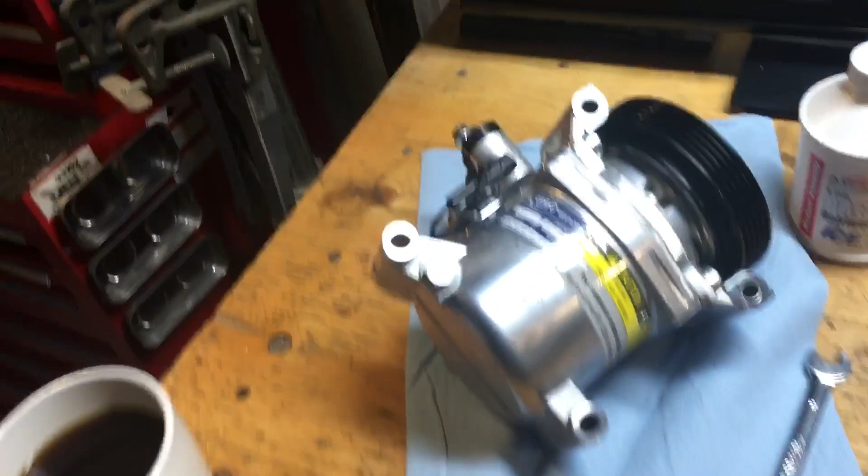So I'm going to get on with the air conditioning refrigerant compressor replacement in this car, guys. You guys know the story. Lots of issues with the car over the past. The compressor that's currently in the car has multiple issues.

The main one currently being bearing failure. So why not replace the bearing? As I said, there's multiple issues. Look at the back videos if you're interested. There's the part number, manufacturer. Take note, the oil, the refrigerant oil that's in here is PAG 100.

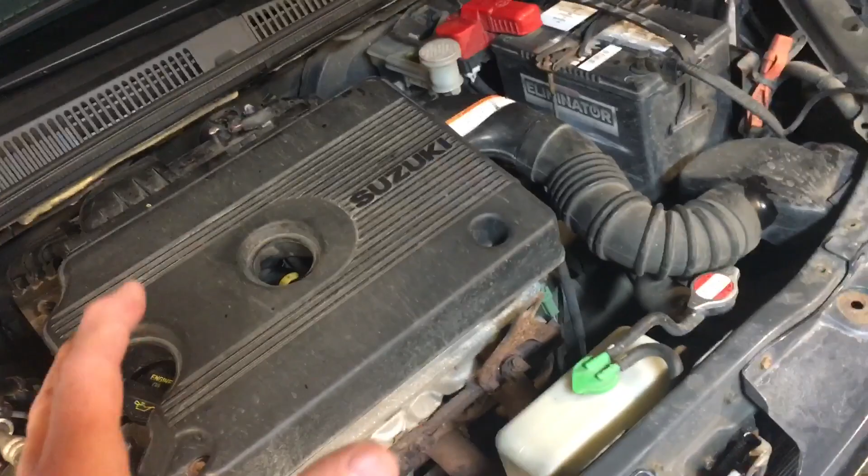The car is originally equipped with 46. Okay, so let me say this again, because somebody pointed out in the comments that I've got the wrong oil. The original installation calls for PAG 46. Why am I putting 100 in there? Because the compressor is the most critical component in the system with respect to lubrication requirements.

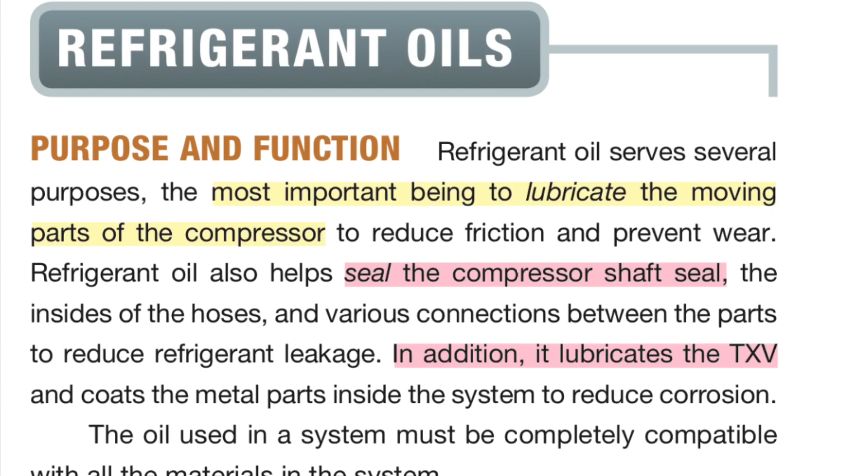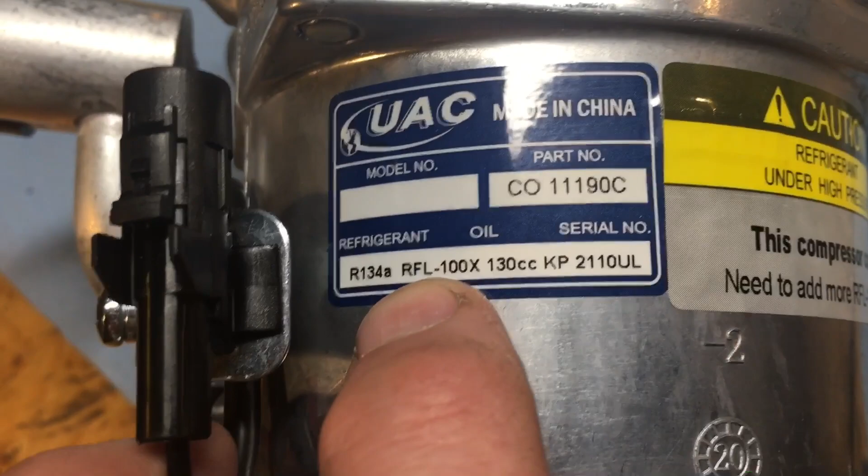Don't take my word for it. Here's what James Halderman has to say. Apart from the expansion valve, the thermostatic expansion valve, which moves very little, of course, this is the main concern with refrigerant. It seems kind of stupid to ignore the specification that the manufacturer spells out, both on the compressor and on the box. There's the part number, by the way, if you're interested.

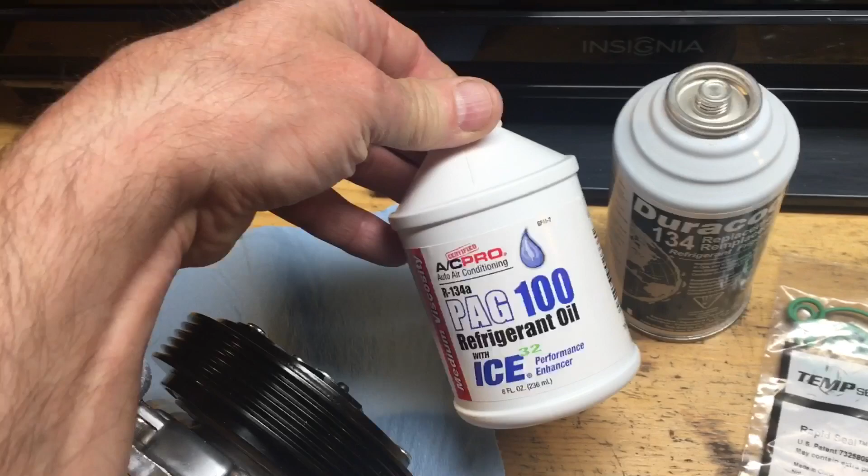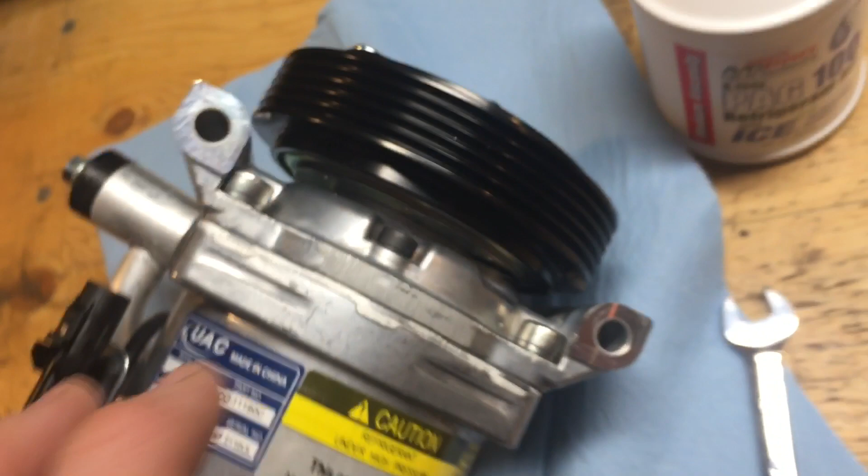100, right? We'll do a bit of an oil balance. I'll try and purge the system best I can. So you'll need the compressor, of course. You'll need perhaps oil, I don't know. Well, this comes shipped with 130 cc's in here. The decal actually tells you so. Although 130 cc's of oil is not 5 ounces, but academic perhaps.

Another point of interest, I will be using an R134A replacement, guys. This is basically propane butane mix. That's why when you see, when I've got the manifold up, it might not be R134 that I've got on the screen as far as the refrigerant in use. It might be the propane spec. I think it's R700 and something, I don't know, I'll look it up. So in case that confuses you, just to be clear.

So I'm going to show you a wee bit of a summary of how I'm going to approach this.

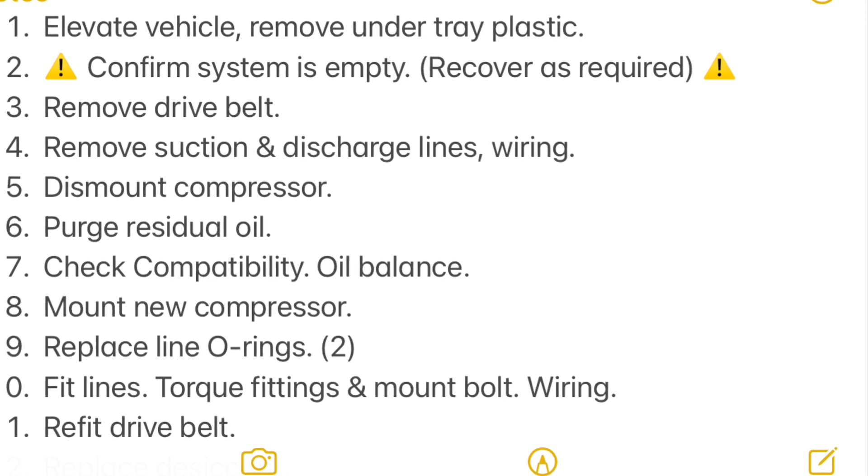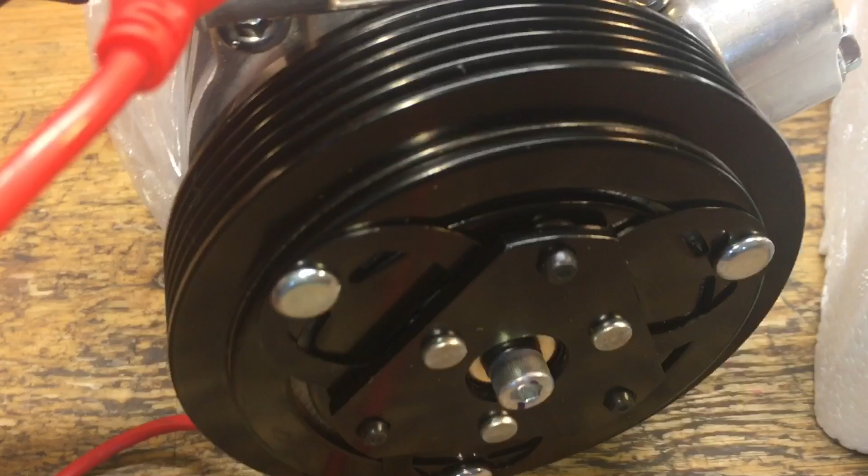It's functional. You can see the coils clearly pulling in the clutch. And so about 3.7, so that's about 4 ohms ish. Quick math, sounds about right.

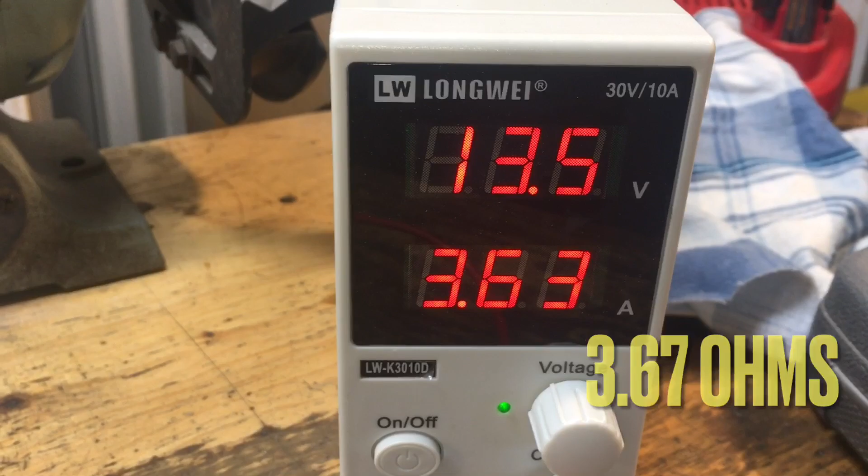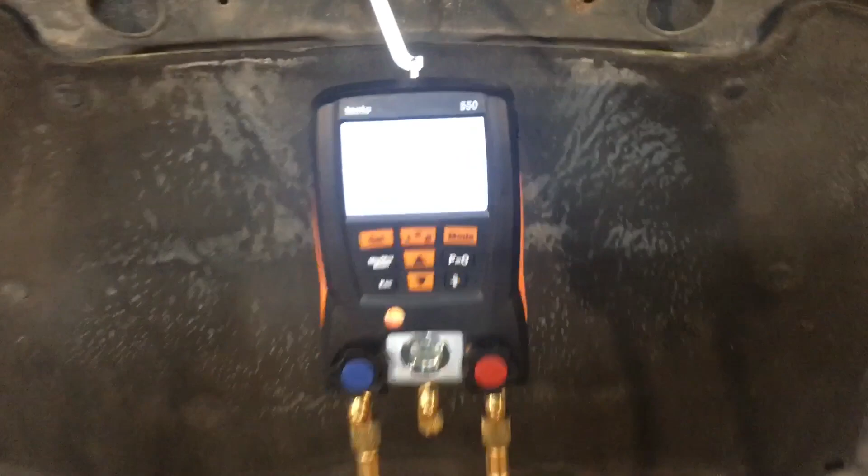Be sensible. So the gauges are hooked up to the car here, guys. You can see the system is completely empty. Both valves are open, and the depressors are screwed down on the couplers. System's completely empty.

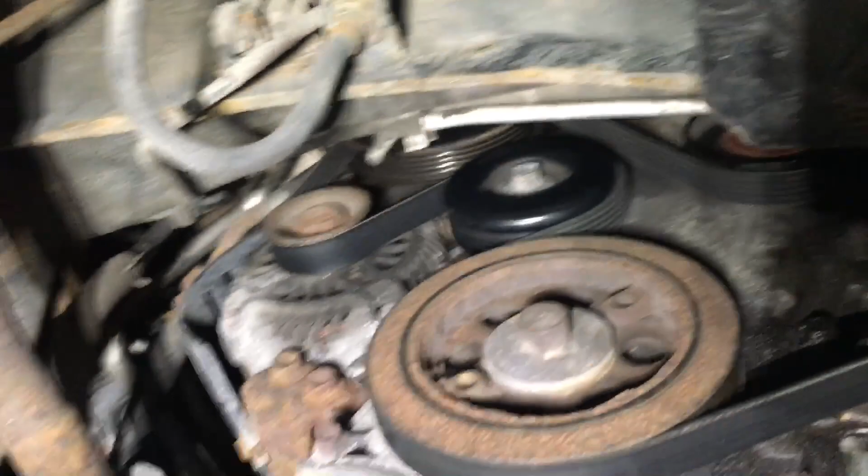Try and do this one-handed. 14 mil onto the belt tensioner there, guys, to remove the belt. This is a non-AC belt. I actually had this jumped out because of the state of the bearing.

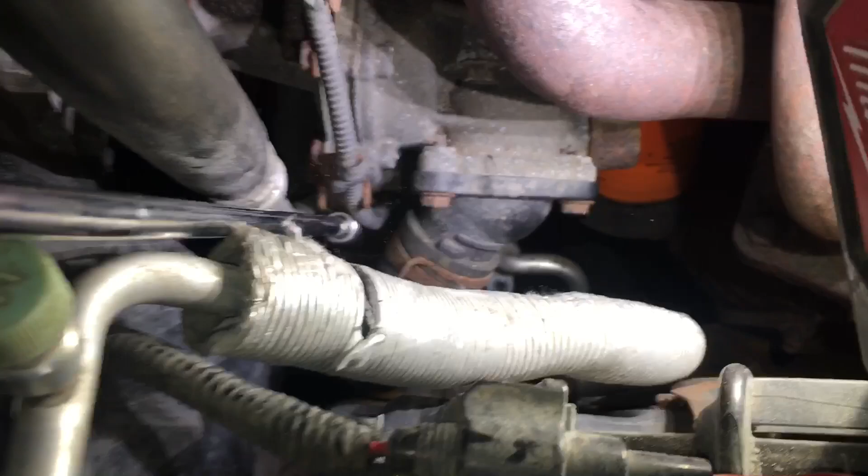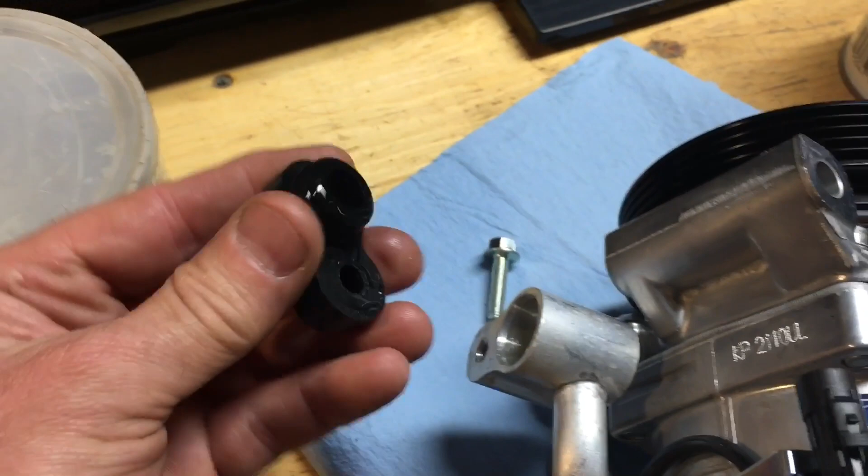A long extension with your 10mm socket, guys, is ideal. The angle is reasonable. You get down on those 2 bolts to hold the lines on. The O-ring will need to be replaced, and be aware the caps on these, they are in fact O-ringed. This is pressurized with nitrogen, I believe, when it's shipped, so be aware when you remove it.

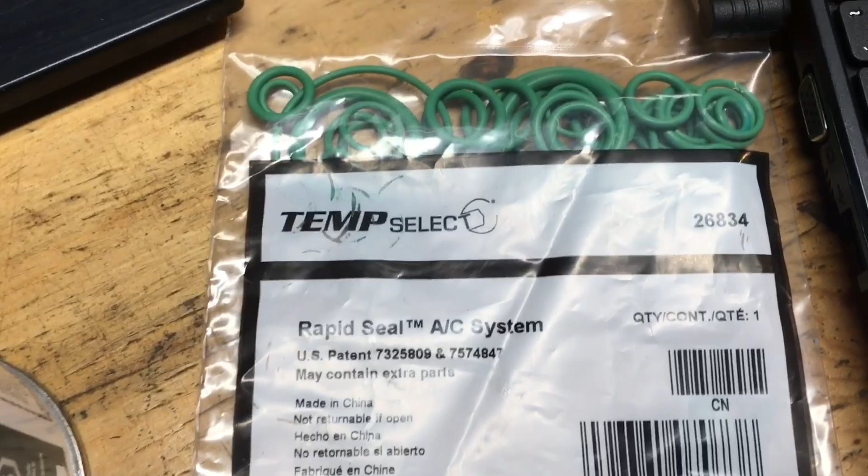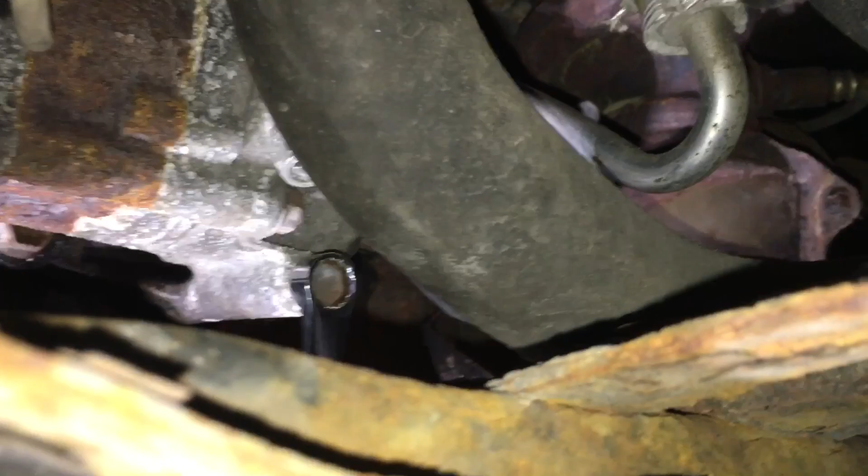And I bought myself just a generic O-ring kit to replace the rings. So the 4 mounting bolts here, guys, ideally if you have a long spanner to crack them, because they'll be corroded in there pretty tight by the time you get to them, no doubt. I had this compressor off last year, so these are not too bad.

As I said, 12 mil. They're quite long.

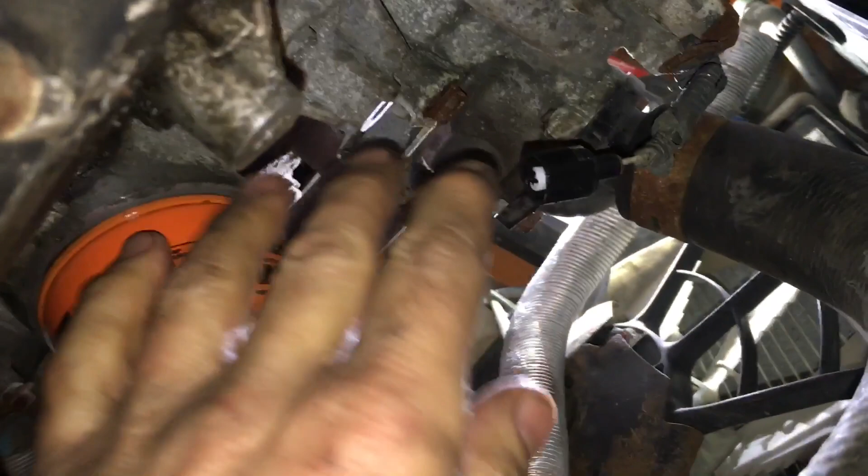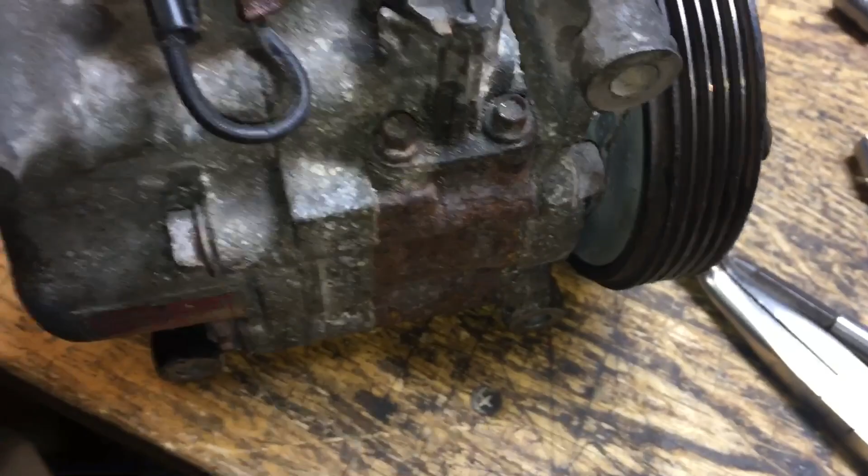Just before you remove the last 2 bolts to get the compressor out, guys, don't forget about the connector here. Try not to damage that. You're going to have to reuse that. Pretty straightforward, not rocket science. As I said, 4 bolts. The 2 bolts for the lines, 10mm, and the lines themselves.

The compressor is a wee bit different, being an aftermarket one. It's probably designed to be used on different applications. But the main mounting points, of course, is a showstopper. They do appear to be the same.

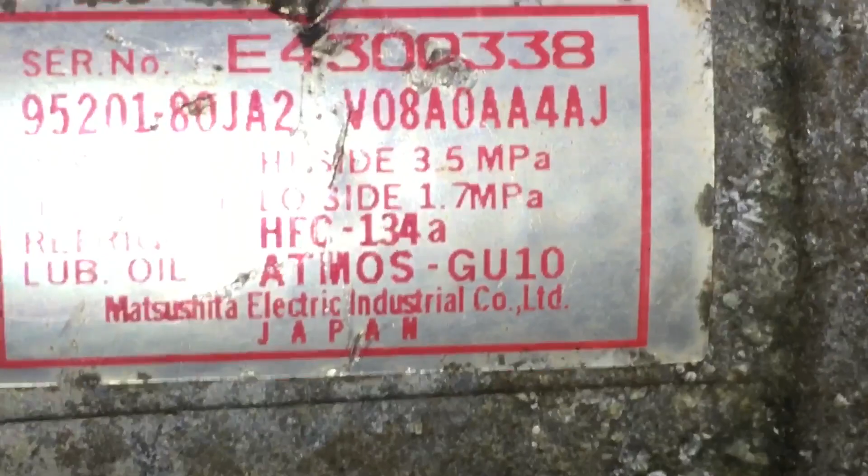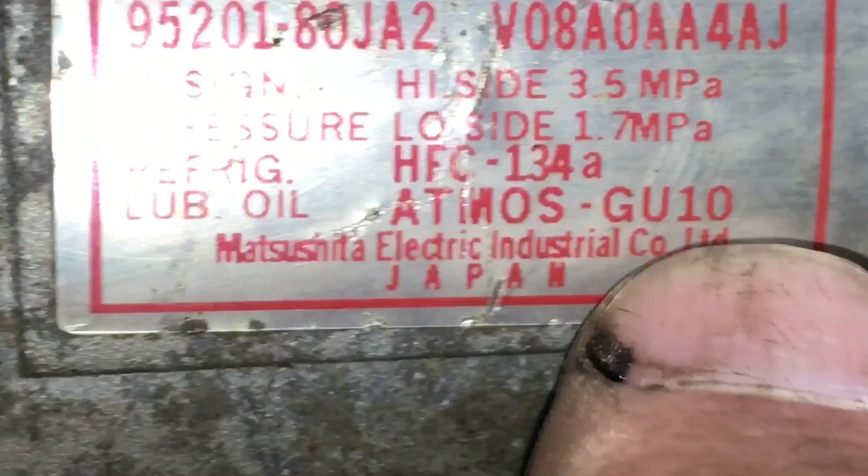I think I mentioned this is a Panasonic compressor. Perhaps I was mistaken. It looks like a, well, I'm mistaken. It looks like it's a Matsushita. Yeah, and although that doesn't say PAG 46, I think if you cross-reference this, it is PAG 46, the original installation.

So you can see they have an adapter line here to bring this line up to roughly where it should be. I hope none of this causes any grief. Physically, it's a wee bit different in location. The connector appears to be the same, although the orientation appears to be different. Again, hopefully that's not an issue, but I guess we'll find out.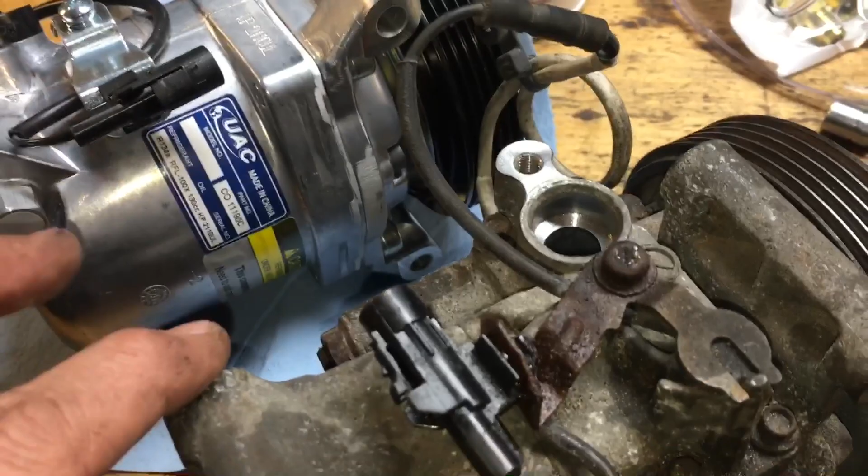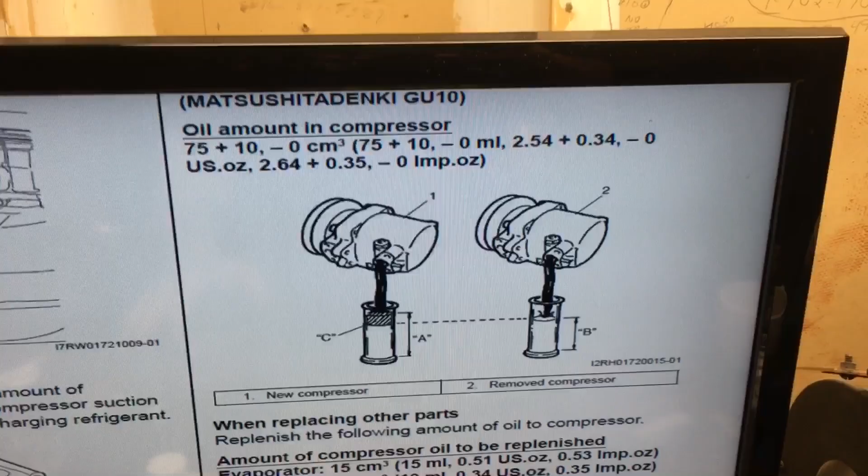So here's the segment in the manual, guys. It tells you how to actually balance the oil. That is to say, when you remove the compressor, how to make sure you have the correct amount of oil in the system. So it also tells you for the relevant parts in the system how much volume of oil.

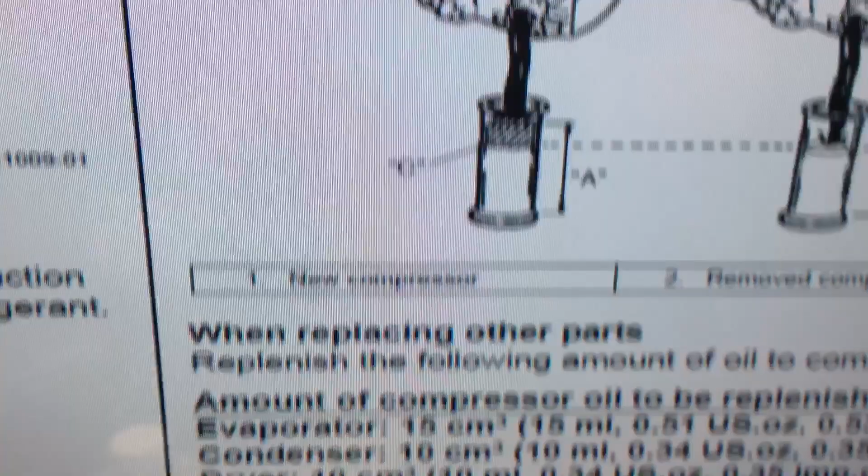So what I've done is I've taken, when you replace the compressor, it says 75 cc's of oil. I won't bore you with the details of all the other components, but also if the refrigerant is replaced, it tells you another 10 cc's. So I've done the math, and guess what? It adds up to 130 cc's, which is what's in here.

So I'm in a position where I'm going to attempt to purge any oil in the system, get as much as I can. It's inevitable I'm going to have a bit of intermix, but as far as I know, 46 and 100 are miscible. So a degree of intermix is, as I said, inevitable. Not ideal, but I'm going to see how much oil I can get out of this, although I suspect it will be very, very low.

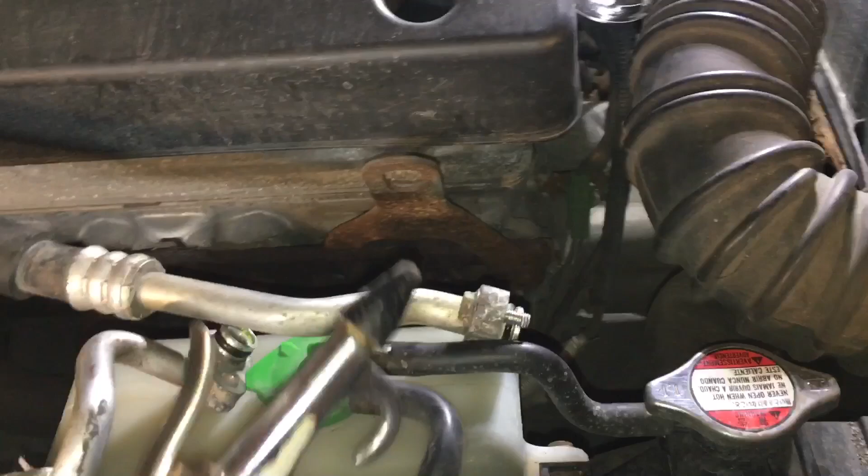So, as suspected there, guys, I didn't get much out of the compressor, 10 milliliters, cc's. So because of the oil spec issue, what I'm going to try and do is blow the system out to see how much oil I can actually capture, and then once I have the figures for what I've removed versus what should be in there, I'll try and make a judgment call. Not ideal, but I don't see how else I can actually deal with this.

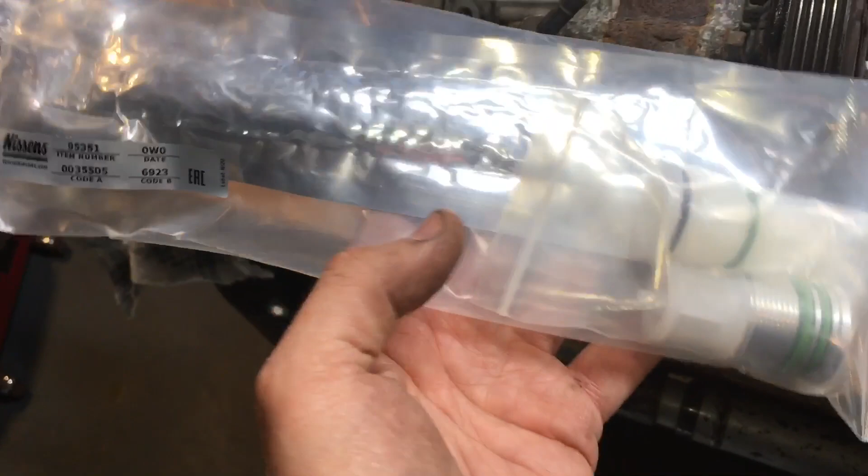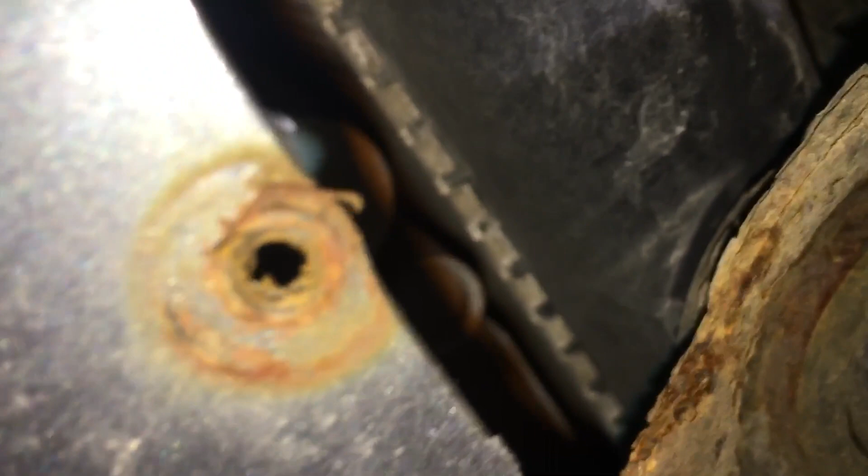So as I said, guys, because of the likely contamination in the system, moisture wise, I'm going to change the desiccant bag anyway. So you can see there's a couple of plugs on the bottom of the condenser that houses the desiccant bag. Now this is an aftermarket coil, so yours may be different if it's the original installation, which I think is a Denso. This is a Nissens, not to be confused with Nissan, but Nissens.

So I'm going to take that plug out the bottom. That's where the bag actually slips up the tube there. And I'm going to assess the oil that's in the system from here. Again, trying to make a reasonable decision.

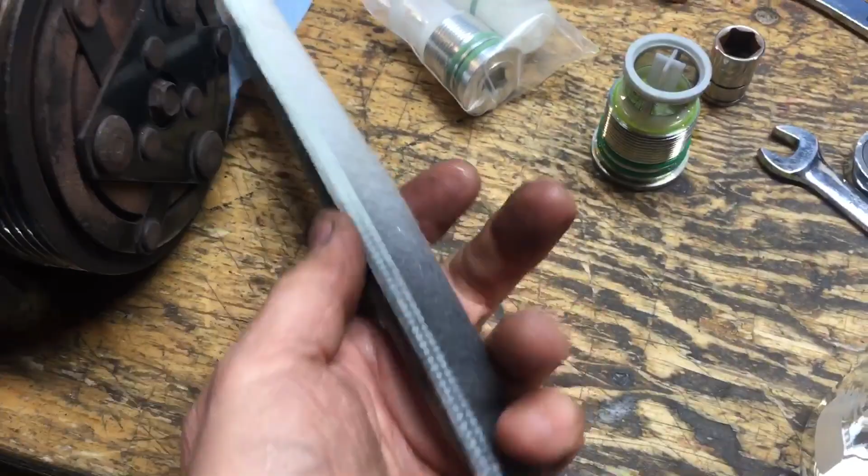So there's the plug. There's another few milliliters of oil in the bottom there. I expected this to be drenched in oil, but it seems light and dry, so perhaps that's a good sign, a good system. Although I think that blackness is probably moisture. Perhaps that's normal to some degree. I'm not sure. No expert, not by a long shot.

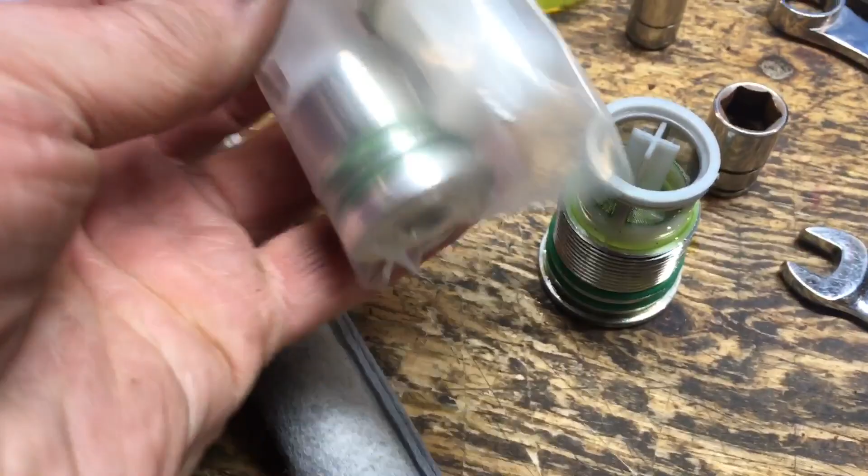None of these plugs seem to be the same diameter. I'll just reuse those, change the O-rings. So what I'm going to do is again try and blow this out from the top side, because of course the desiccant bag is right at the very bottom of the system. I've got the plug out and the catch beaker there. I'll see if I can get any oil out.

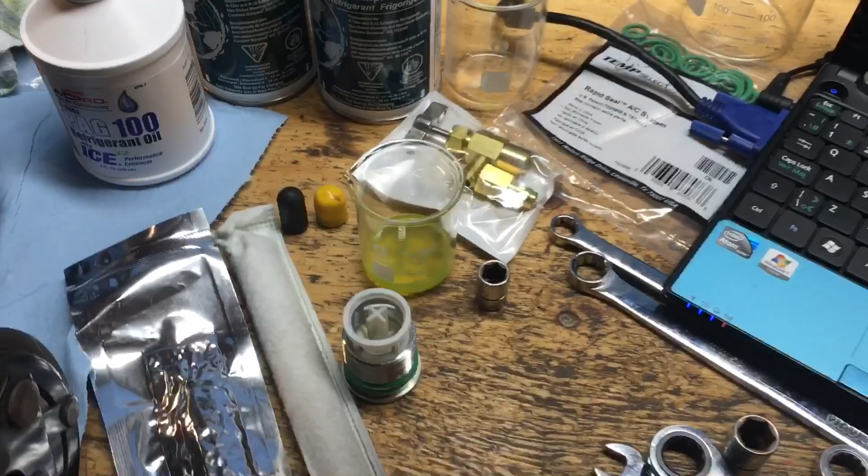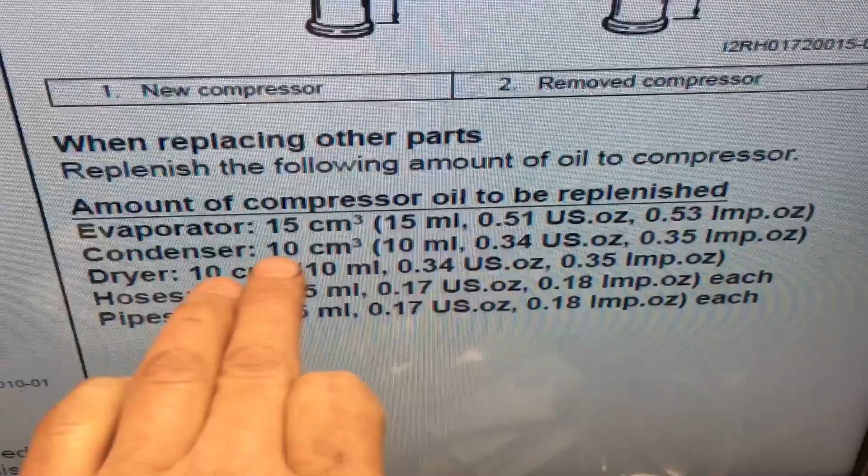Okay, so I was really only able to capture nothing more than a few drops out of the system. So that means this is 10 milliliters, let's say, if the system capacity is 130 milliliters. I'm basically missing about 120. Now, I know when I changed the condenser coil on this a year or two back, I put the correct measure of oil into the system. So I think there's essentially no oil in this system.

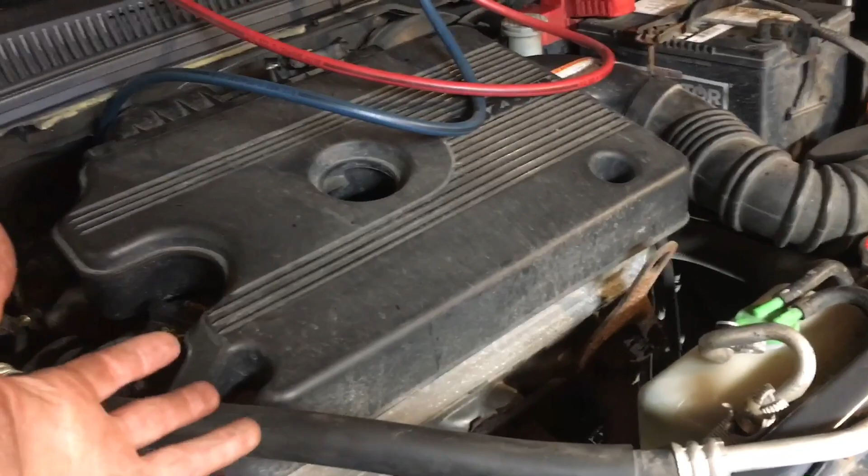I blew it out with my line there. I cranked the pressure up and blew it every which way till Sunday. I can't really extract any oil in there. No doubt there's residual oil in there, it's trapped. X amount of oil can remain in the system. How much? I don't know. But I think it's a pretty small amount.

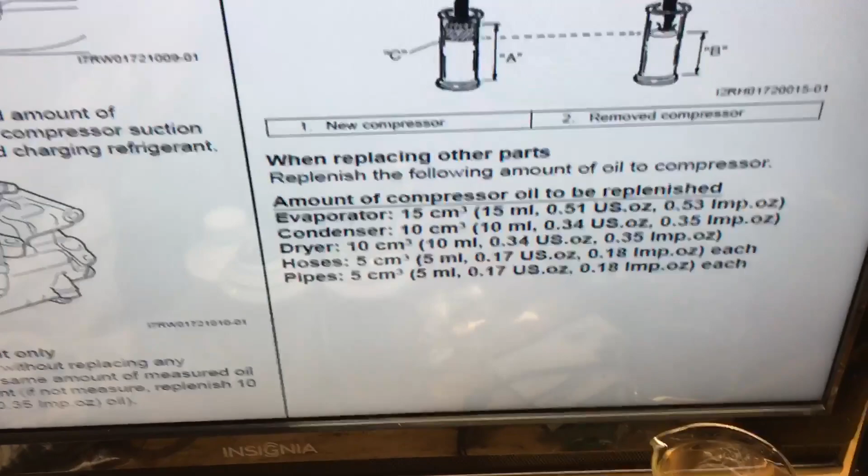So that leaves me with a decision to be made. This comes shipped with the entire system measure of oil of 130 cc's. We've already talked about the volume in the system. I think with this being extracted, it leaves just a residual amount of oil, the original PAG 46 in the system. And again, as far as I know, it's miscible.

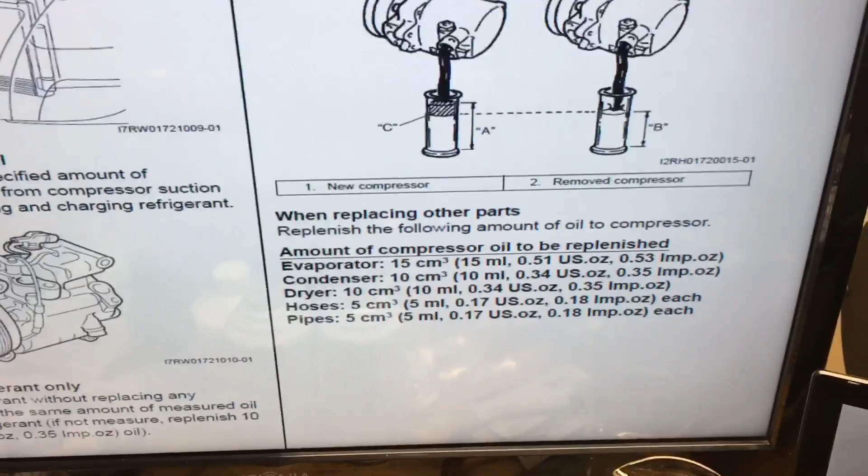So I'm just going to go with this measure of oil in the system on top of the unknown quantity in the system. Now, it might be a wee bit over capacity. So what's the danger of overcapacity? As far as I know, it just can affect heat transfer, less than ideal heat transfer in the system if you have overcapacity oil, too much oil. And of course, ridiculous amounts of oil could potentially slug the compressor, but I don't think that will be the case at all.

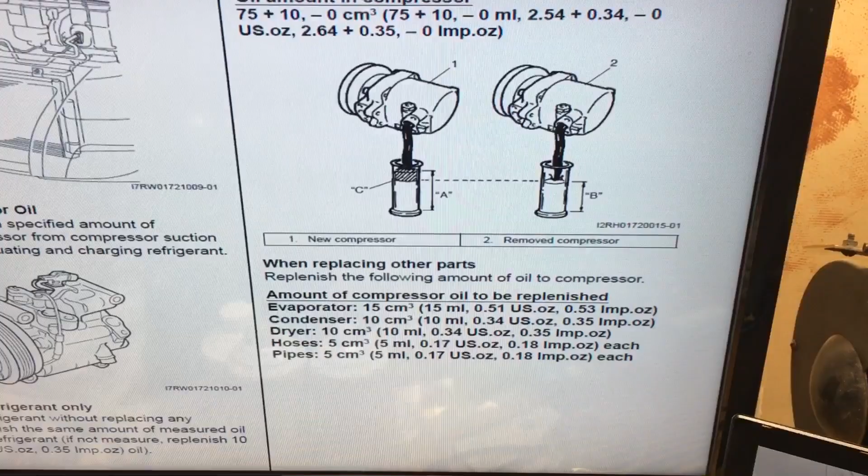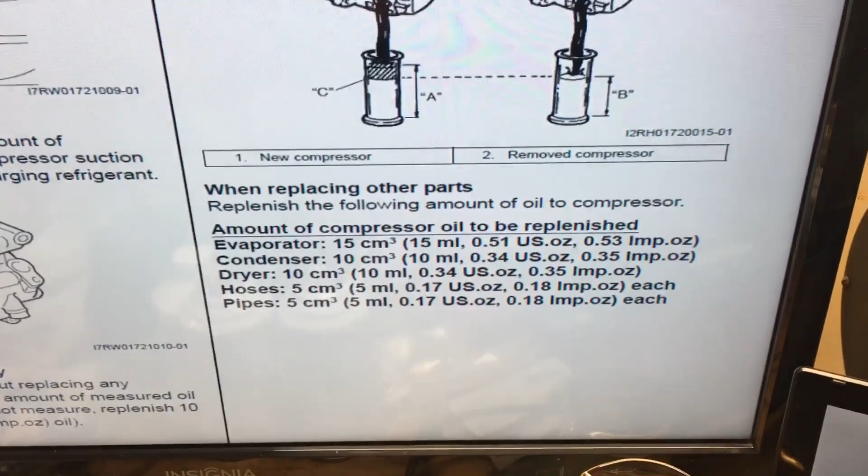The danger of under-oiling the system is you melt the system down, of course. I'm trying to avoid that. So this may not be correct—by all means, sing out in the comments if you disagree with my decision. But I'm going to just leave the standard measure of oil in here, 130, that's the complete system volume on top of the residual oil that's in there. I can't remove any more. I'm not flushing it, that's going overboard. We'll leave it at that.

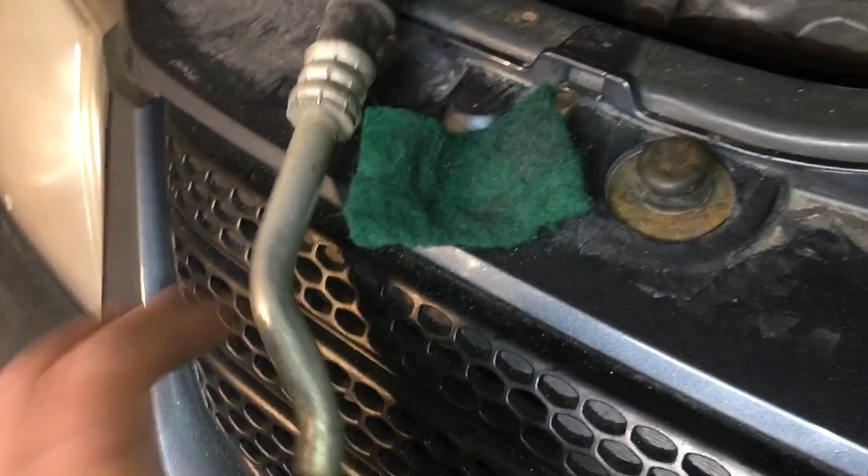There's a fair bit of aluminum oxide formed around the fittings here, guys, so I suspect this job is going to depend to some degree on how clean you can get those. I just Scotch-Brited up the fittings on both sides, and I have them temporarily blocked here so no rubbish gets in.

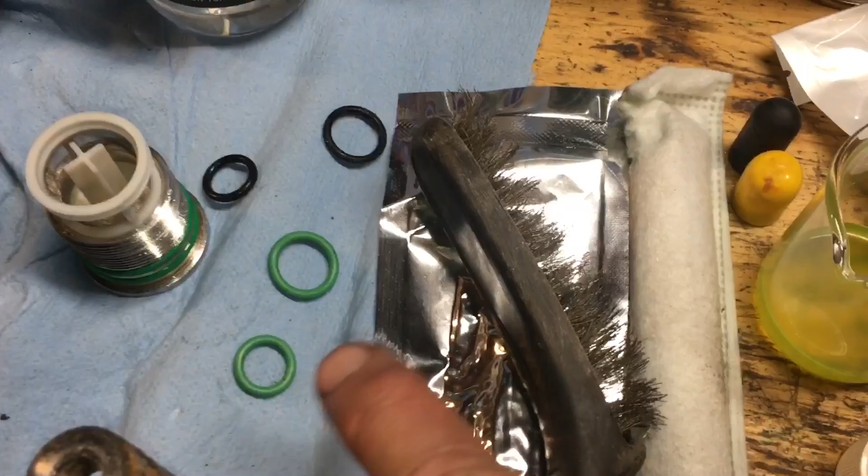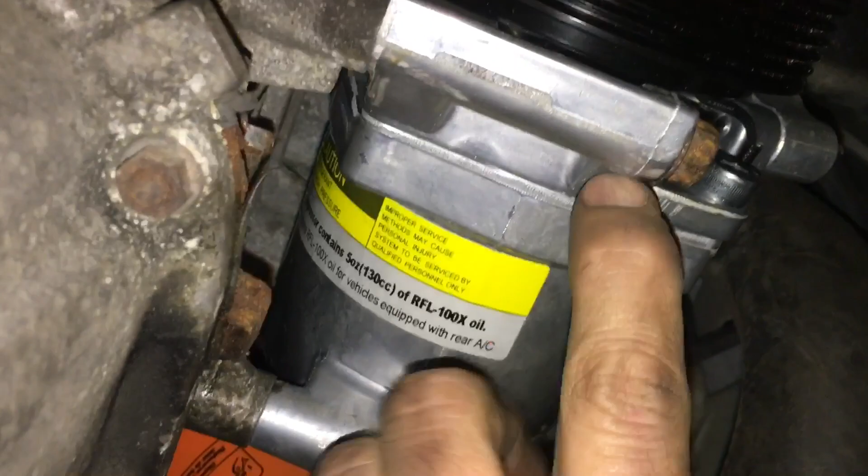O-rings—going to change the O-rings. Perhaps you could use the O-rings that come on the caps, and I suspect some people will, but I'm going to use them from the kit. Four bolts are on and torqued to 18 foot-pounds.

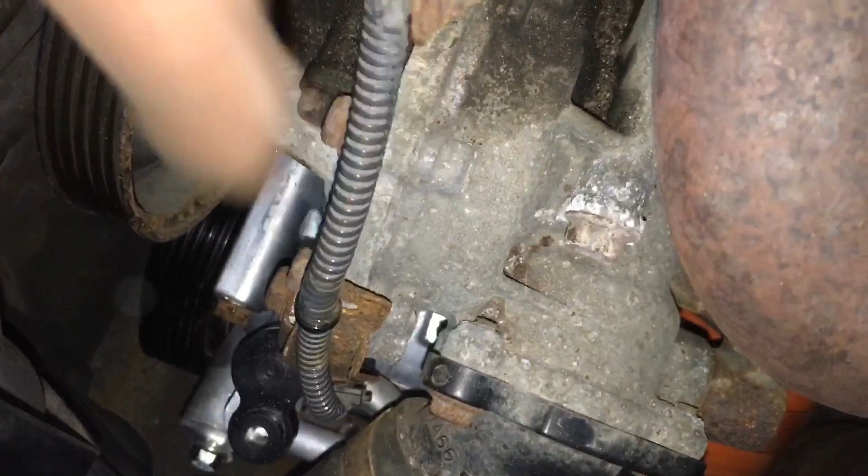Just a suggestion: put the connector on before you actually mount the compressor rigidly, because after an hour of trying to get the connector on due to the different orientation, I had to dismount it again, put the connector on first, and then put the compressor on. To get that connector in place when the compressor is adrift from the block, you'll have to remove the clamping here, the tie wraps, just to get a wee bit of extra play on the harness. Put it back in situ and clamp it back up when the connector's in place.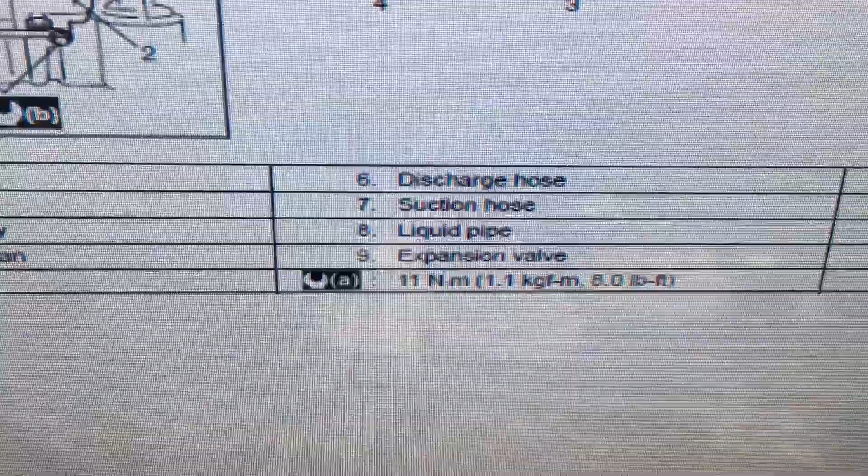So yeah, the two lines here, you're going to have to work these lines a bit, because with the positions being altered they don't fit properly. This line here was contacting the bolt head so I couldn't actually get the fitting bolt on, so I had to take it off, mount it, and bend the line a bit. Typical aftermarket stuff—expect a bit of nonsense with this, but they're on, so we'll carry on.

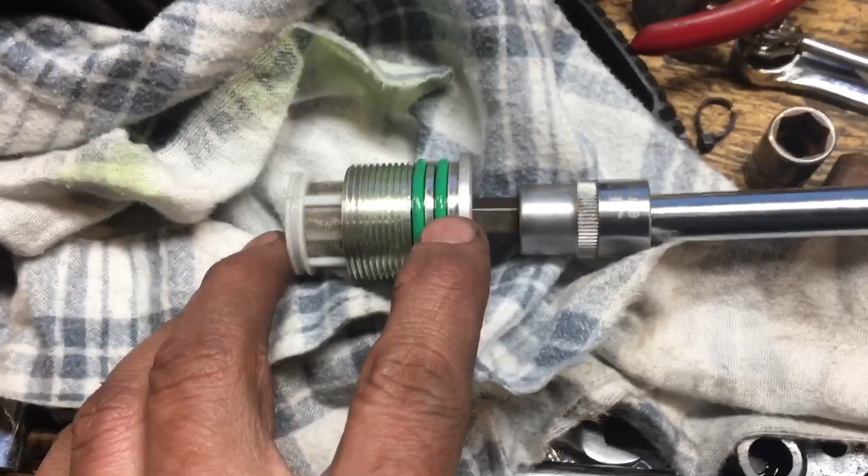So the O-rings on the desiccant can are all cleaned and lubed up. I've cleaned the screen here, guys, it was pretty clean so we're all good. Leave the bag—don't take the desiccant out of the bag until the very last moment, and get it in as quick as possible.

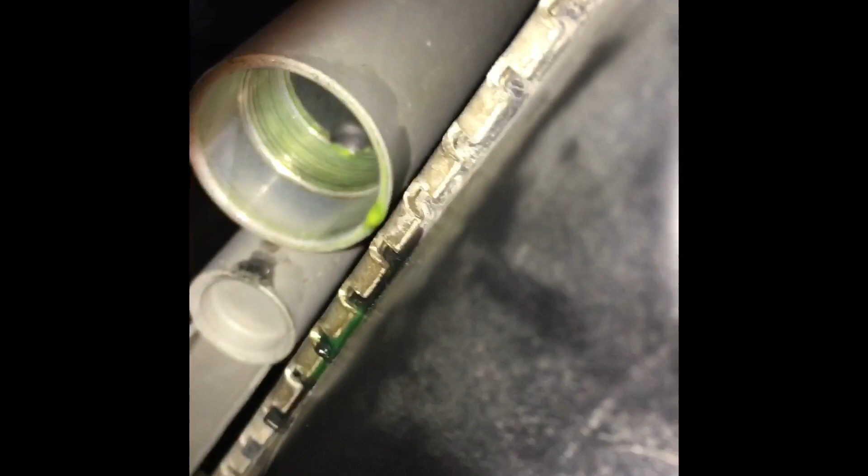Sorry guys, watch what we're doing here—I'm not going to cross-thread this aluminum thread.

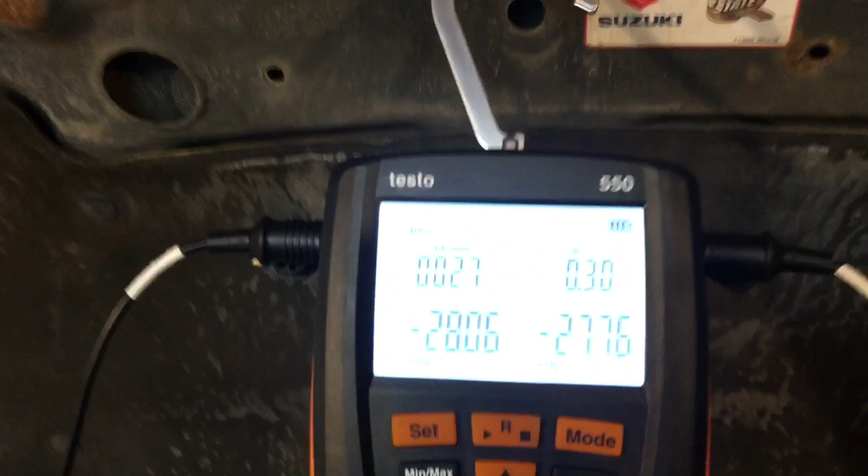Well, it's getting late here, guys, I guess I'll call it a night. Carry on tomorrow—I was just doing a preliminary vacuum check on the system.

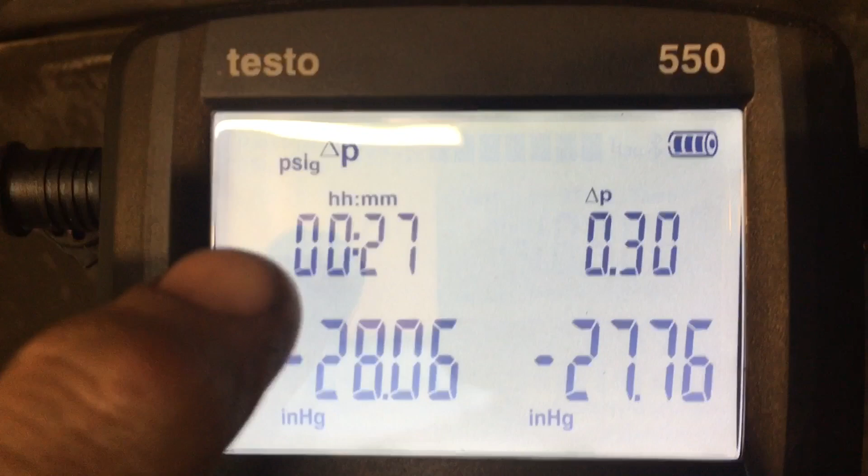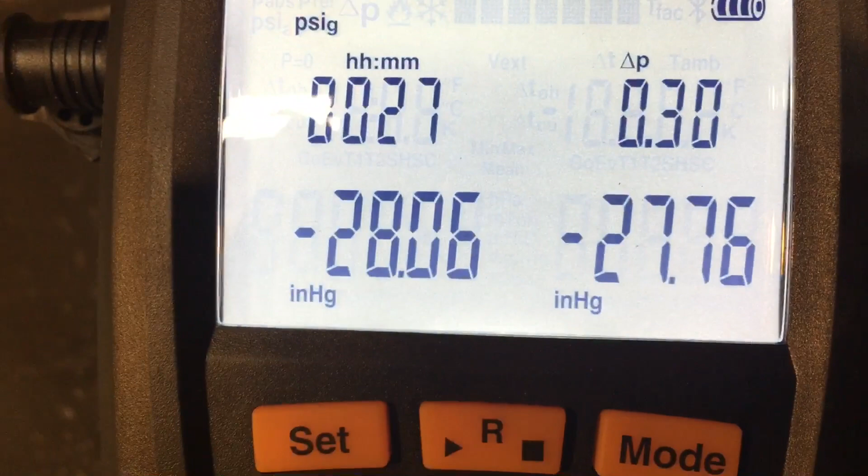No point in doing anything else if it doesn't hold even basic vacuum, so I was just checking it. You can see I'm almost at the 30-minute mark here. I've lost 0.3 of an inch of mercury, so that was lost pretty much right up front. The check has really lost nothing in the last 25 minutes.

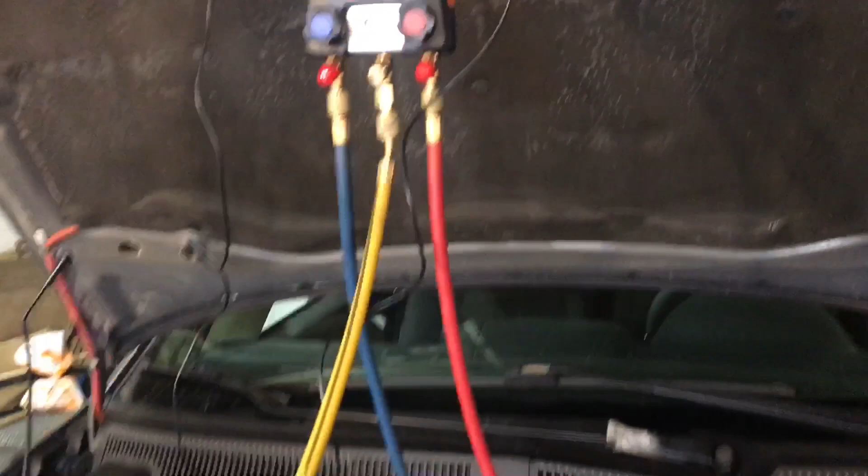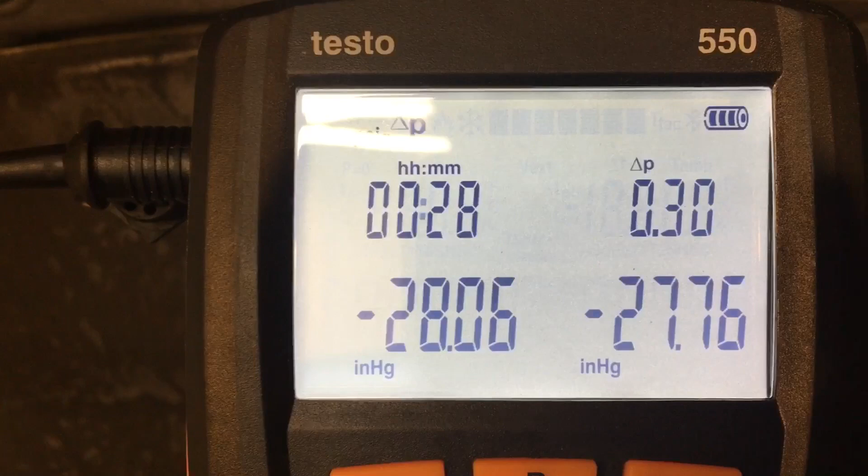So I suspect that was maybe just a wee bit of moisture coming out of the system, or maybe the line constricting a wee bit. There's a bit of an art to reading the gauges when it's a small fluctuation like that, 0.3—is it a real leak? I don't think so, as I said it hasn't changed at all in the last 25 minutes, so I'm pretty happy with the preliminary.

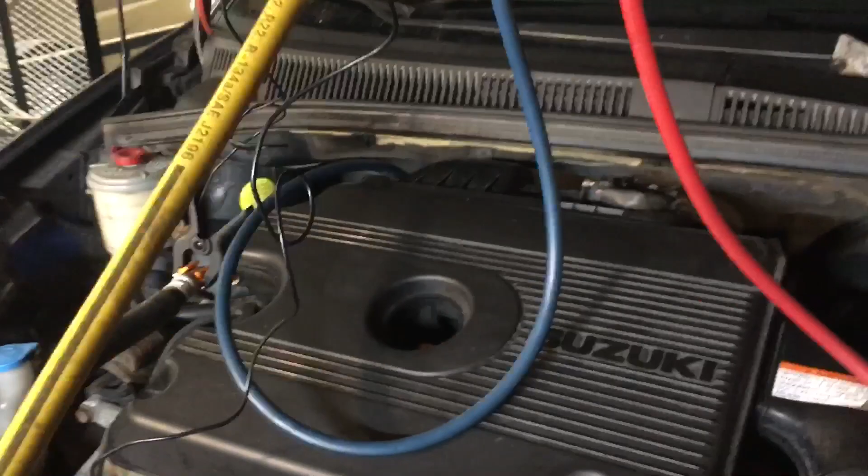As I said, or maybe I didn't, I'm going to check it with nitrogen first. I'm going to take it up to about 120, 140 psi and leak check it with that. I'll nitrogen sweep it, and at the end of the check I'll bleed out some nitrogen again to try to purge out as much moisture as possible, then pull it under a vacuum proper. This is just me setting up the gauges before I call it a night.

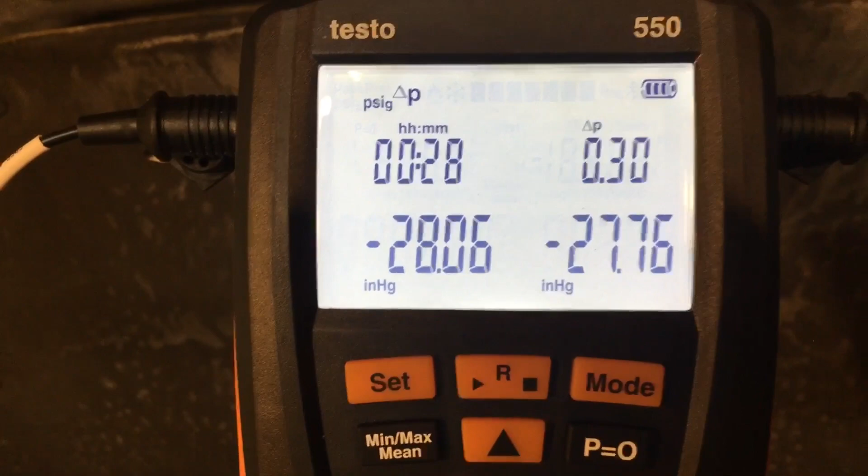So we'll call that part 1, guys, and we'll carry on in part 2, which is basically again the leak checking, pulling the system under vacuum, and assuming everything goes according to plan, installing the refrigerant, function checking the system, leak checking it, operational checking it, performance checking it. We'll see how it goes. That's it, cheers.